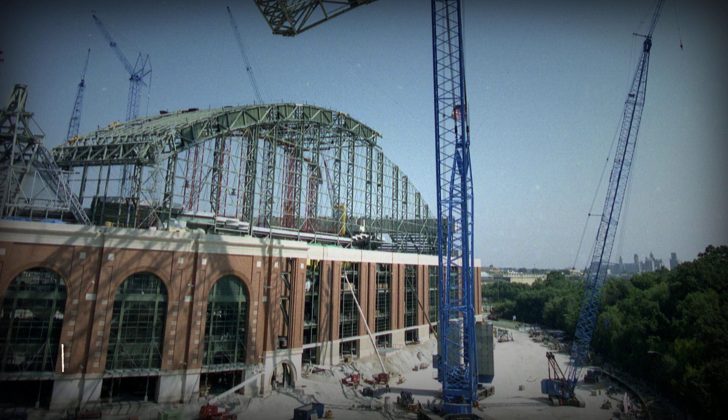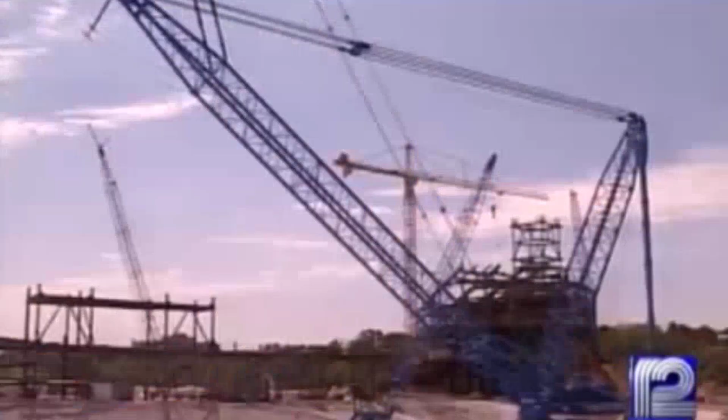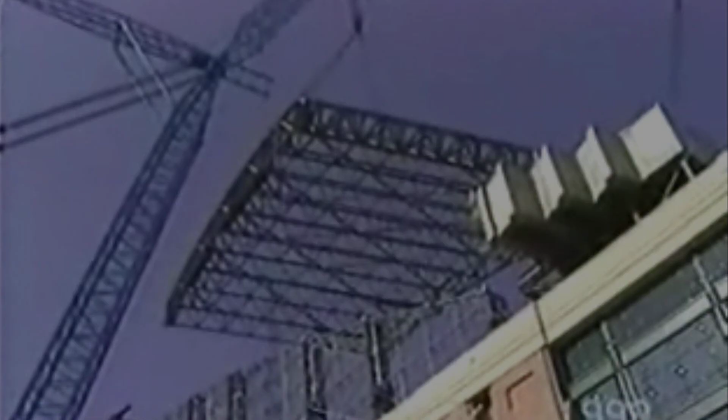July 14, 1999. Milwaukee stands in awe of Big Blue, a 567-foot crane taller than the Washington Monument, a 2,000-ton machine fueled by 11 roaring engines and 6 miles of steel cabling. 9 flawless lifts, each nearly impossible, had already crowned a new stadium roof, but with the 10th lift, management ordered the impossible. A 450-ton section hoisted against urgent warnings as wind speeds soared past safety limits.

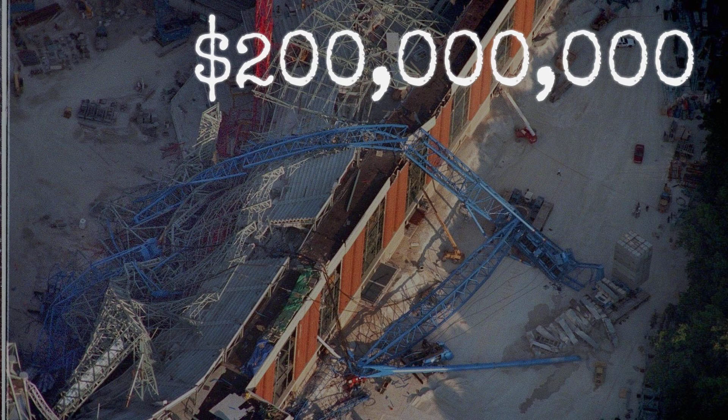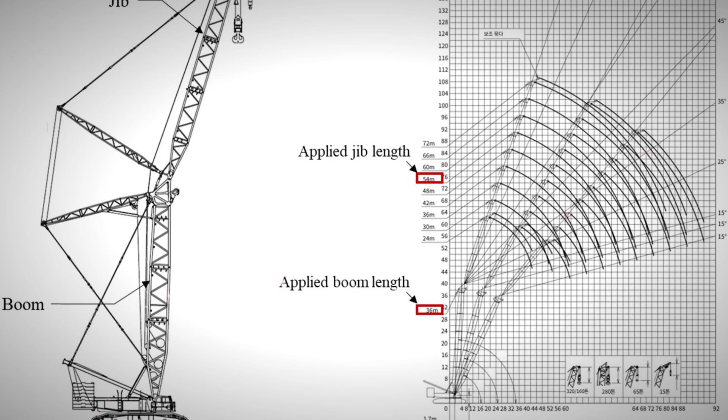Seconds later, disaster. The collapse cost over $200 million and claimed 3 lives, all as inspectors watched, cameras rolling. Why, with all eyes on safety, did the world's most powerful crane fail in plain sight? The answer reveals more than a single flaw. It exposes a lethal chain of decisions no one believed would snap.

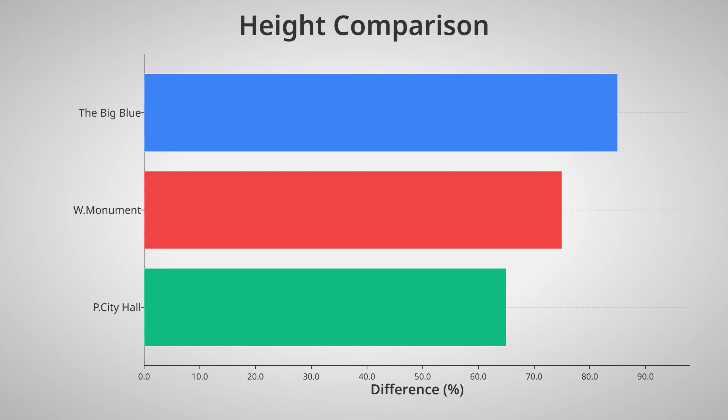The Lampson LTL-1500 Transi-Lift was more than a crane. It was an engineering spectacle. Rising 567 feet above the Milwaukee skyline, Big Blue outstretched even the Washington Monument. At over 2,000 tons, its mass equaled more than 500 pickup trucks.

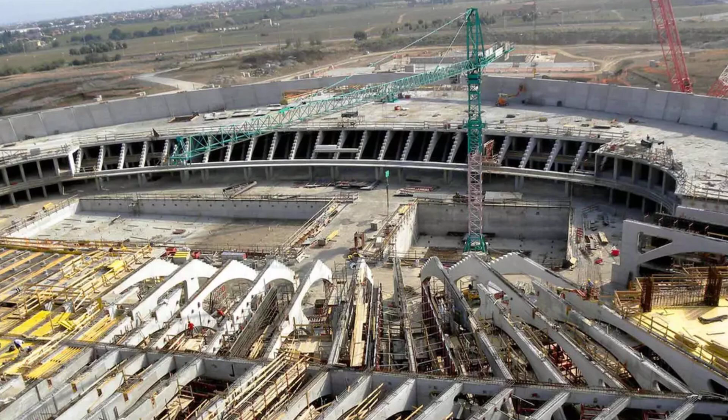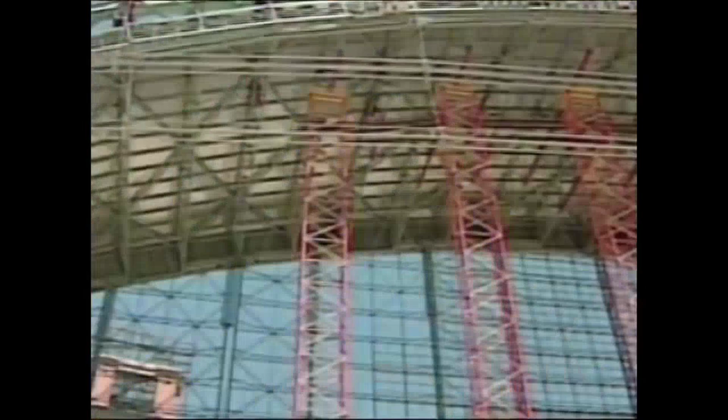Its reach was legendary. A 460-foot main boom, plus a 200-foot jib, allowed it to position massive roof sections with surgical precision. To balance such immense forces, the machine carried 1,150 tons of counterweight. 11 diesel engines powered its every move, a mechanical chorus with the output of a small fleet of city buses. 6 miles of steel wire rope threaded through its structure, enough to stretch from Miller Park to downtown Milwaukee.

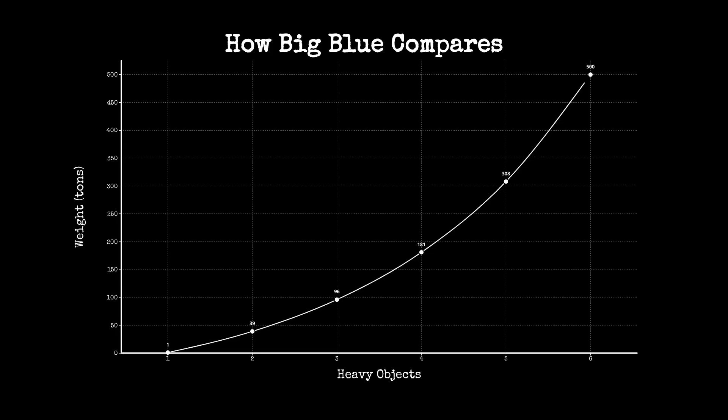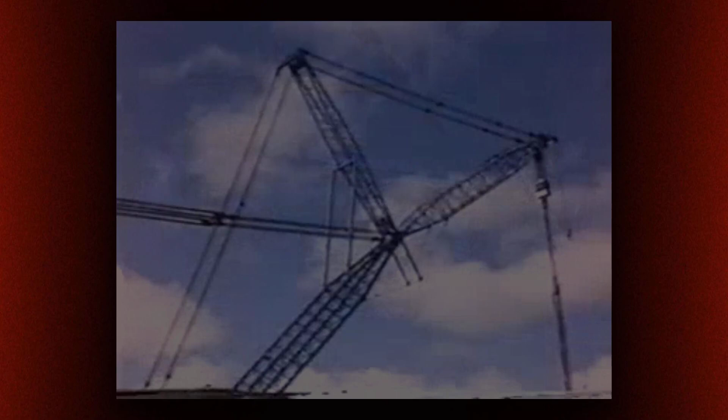Big Blue's lifting power was unrivaled. It could raise 1,500 tons in a single motion, roughly the weight of 10 adult blue whales. Even at a 230-foot radius, the crane could still hoist 500 tons, a feat that would challenge most machines even at half that distance. Its crawler tracks gave it rare mobility, letting it move across the site while carrying a load that would anchor lesser cranes in place.

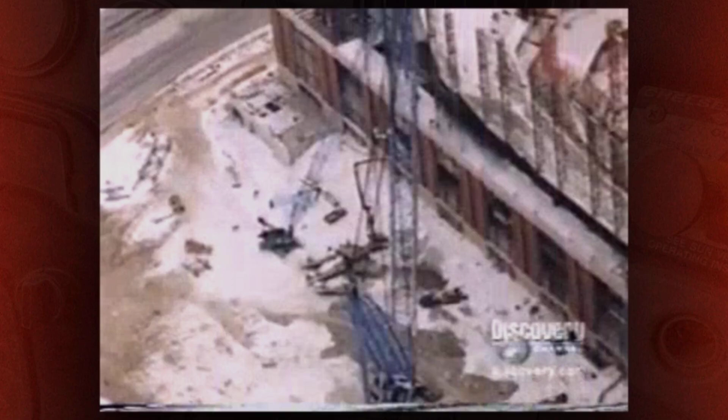Every component was oversized, engineered for the heaviest, most demanding lifts. The operator's cab perched high above the ground, surrounded by a network of controls, sensors, and safety systems. For 9 consecutive lifts, Big Blue had performed flawlessly, delivering 400-ton roof sections onto the stadium's skeletal frame. Each lift pushed the boundaries of what was possible, but always within the machine's design limits.

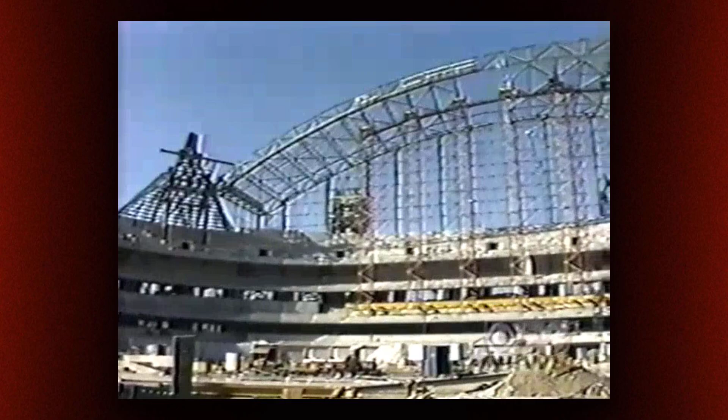The scale was almost unimaginable. Steel, diesel, and wire rope working in perfect harmony, all to crown Milwaukee's new ballpark. Yet, for all its strength, even a giant like Big Blue was bound by the laws of physics. The limits were clear, and any breach would carry consequences on a scale as large as the machine itself.

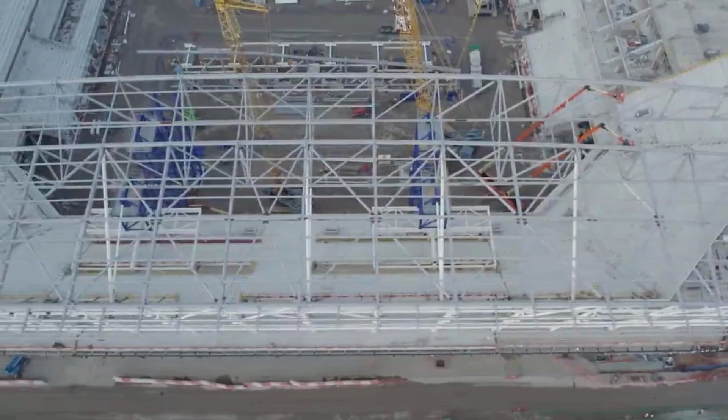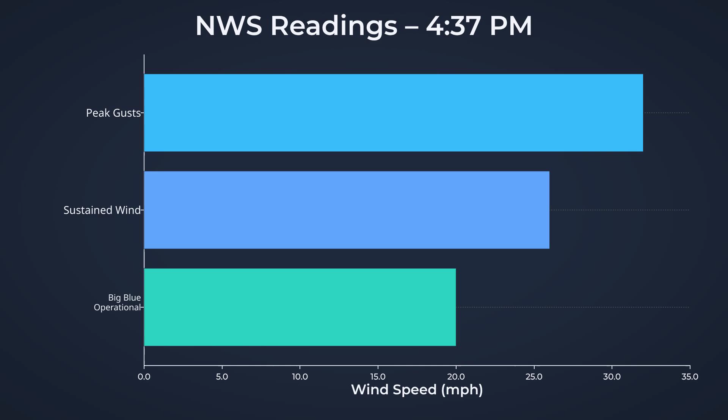Winds swept across the half-built stadium, rattling steel and sending dust swirling around the base of Big Blue. By late afternoon, the National Weather Service recorded sustained winds above 26 miles per hour, with gusts climbing even higher, well past the crane's 20 miles per hour operational limit. In the cab, Terry Young watched the anemometer needle swing, the numbers refusing to drop.

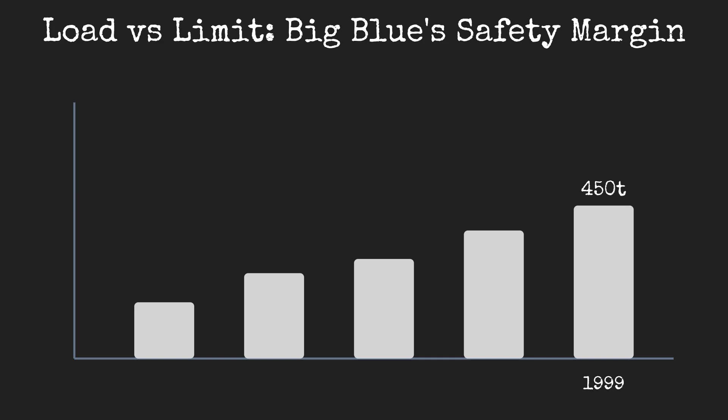The roof section waiting overhead weighed 450 tons, nearly the size of a loaded Boeing 747. Every calculation said this was the edge of what the machine could handle, even in perfect weather. Over the radio, Young's voice cut through the static. He asked for a pause. The wind was too strong, he warned, and the new roof piece would catch the gusts like a sail.

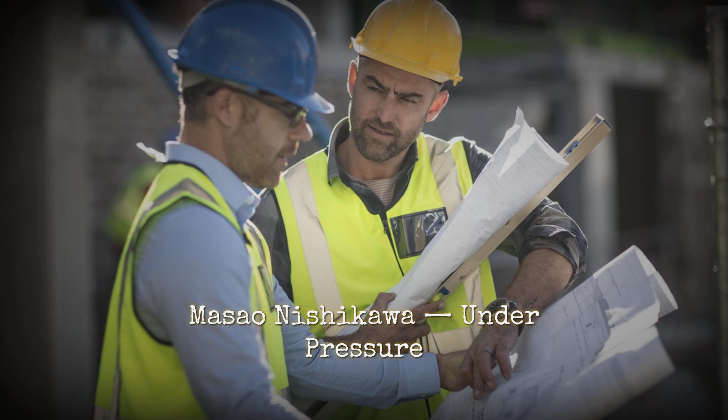But on the ground, Masao Nishikawa, the site manager for Mitsubishi Heavy Industries America, faced a different pressure. The project's penalty clauses meant every hour of delay carried a heavy price. Schedules were slipping, and the stadium's opening day was already at risk. Soil beneath the crane had already sunk by a foot that morning, a silent warning that stability was not guaranteed.

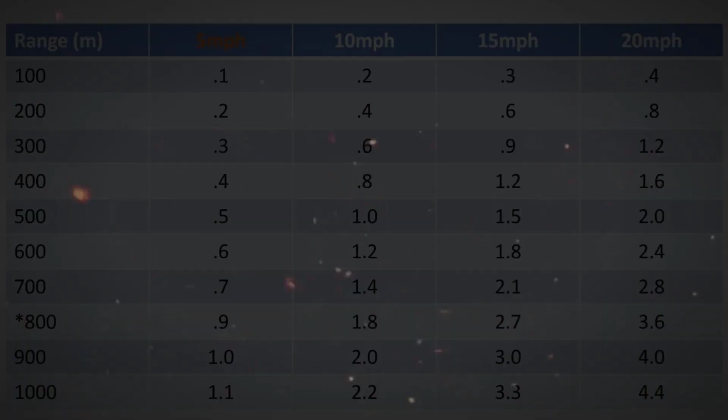Yet, with the afternoon slipping away and the contract clock ticking, Nishikawa ordered the lift to proceed. The decision was final. The operator's hands stayed on the controls, but the authority to stop was gone. Wind readings on paper told one story. The reality, 400 feet above ground, was another. At that height, gusts can surge 40% higher than at the surface, turning a 26 miles per hour reading into a force capable of swinging hundreds of tons.

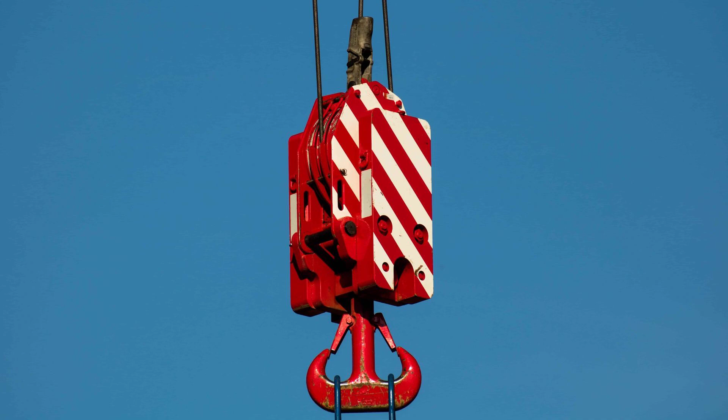As the signal came to start the pick, every hazard, wind, soil, pressure, aligned. The next few moments would test the limits of steel and the limits of human judgment. At 5:12 p.m., the moment the signal was given, a wall of wind swept through the open bowl of the stadium.

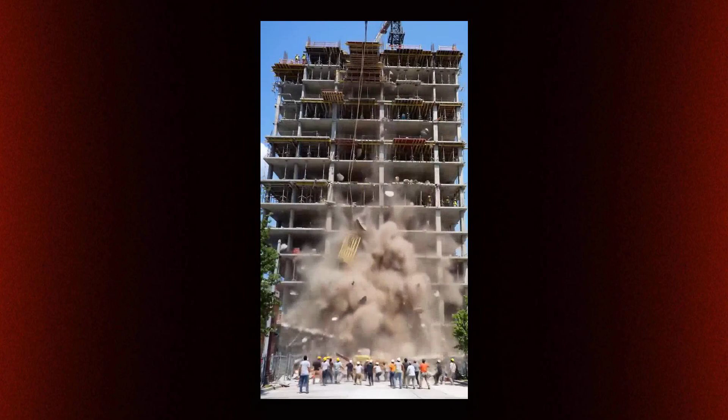The 450-ton roof section, already suspended high above the ground, caught the gusts like a canvas stretched across a frame. Instead of moving smoothly into place, the load began to sway, amplifying every pulse of wind into a force the crane was never meant to resist.

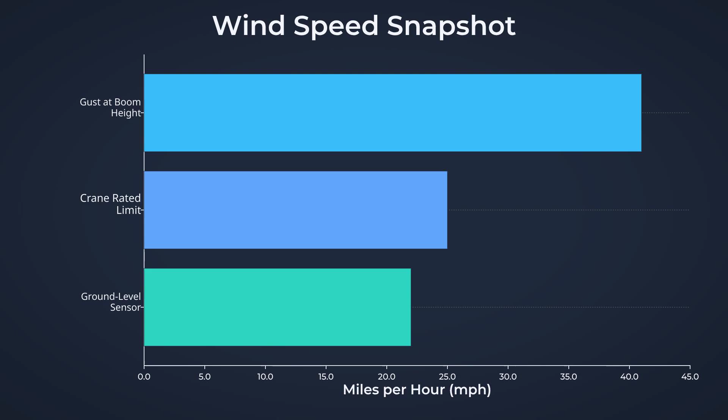At the base, the kingpin, an alloy steel shaft meant to anchor the entire rotating assembly, became the fulcrum for disaster. Wind pressure on the roof panel surged far beyond what ground-level readings suggested. Computational models later showed that gusts at boom height could spike over 40 miles per hour, nearly double the crane's rated limit. The roof section's broad face acted as a sail, multiplying the lateral load and twisting the structure against its own foundation.

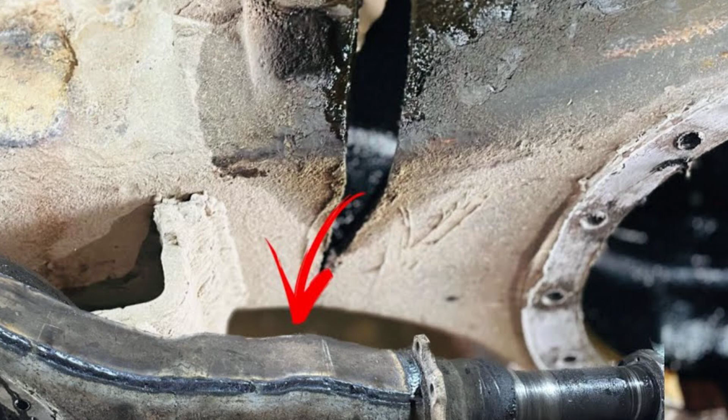Inside the cab, Terry Young would have felt the machine shudder, the controls suddenly sluggish, the world outside tilting out of balance. A sharp metallic crack split the air, a sound captured on OSHA's running video. That was the kingpin, already weakened by an undetected crack and field modifications, giving way under the combined assault of shifting mass and side wind.

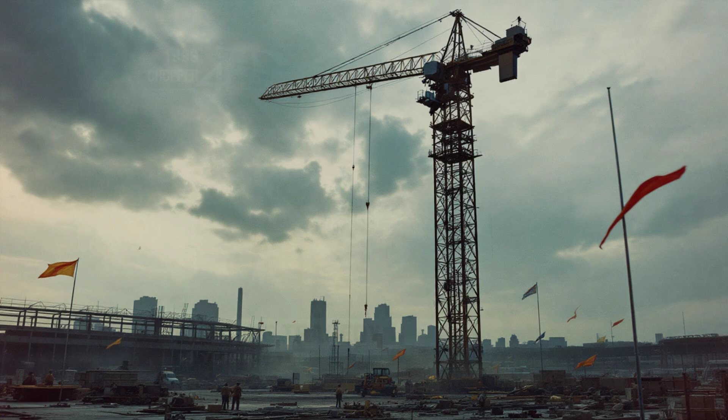In a fraction of a second, the bronze spacer beneath the kingpin shattered, ejecting fragments and shearing the locking ring clear. Freed from its anchor, the entire rotating assembly lurched sideways. The boom and jib, still bearing the full weight of the roof, began a slow, inevitable collapse. Steel cables snapped in sequence, counterweights tore free, and the lattice boom folded as if it were made of wire.

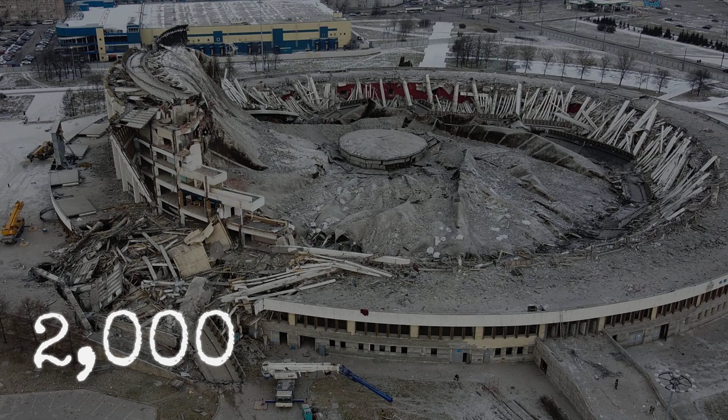The entire superstructure toppled in a chain reaction, the mass of 2,000 tons crashing down onto the site below. The collapse was over in less than 10 seconds, but the mechanical violence unleashed in those moments would echo through every corner of the construction industry.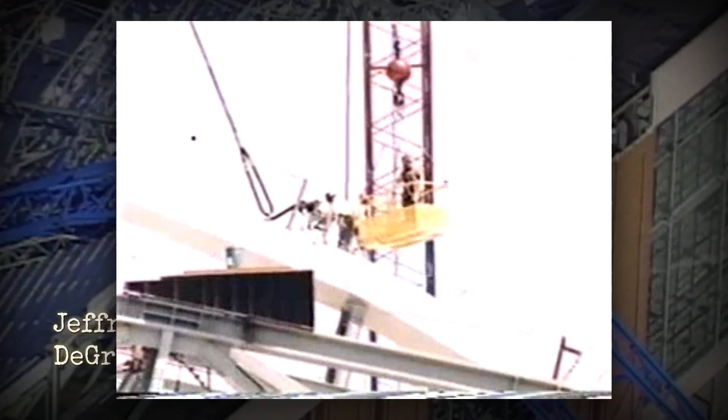3 ironworkers lost their lives beneath the tangled wreckage: Jeffrey Wischer, William DeGrave, and Jerome Starr. Each was working from a personnel platform, suspended high above the ground, when the falling boom struck without warning. Their names are etched into the memory of Milwaukee's labor community, and in 2001, a bronze sculpture by Omri Amrani was installed at Miller Park to honor their sacrifice. For their families, the aftermath was measured not in numbers, but in absence.

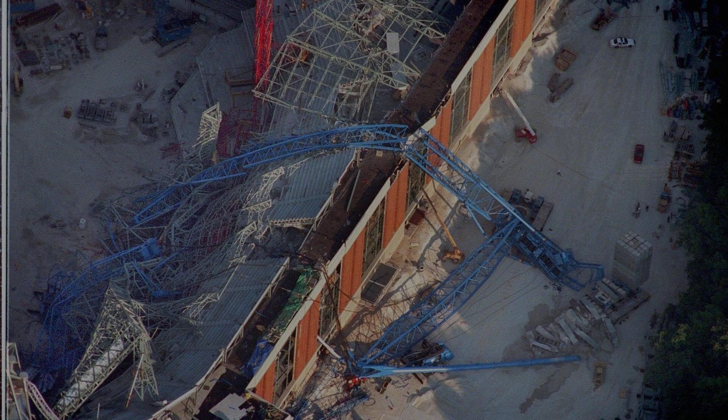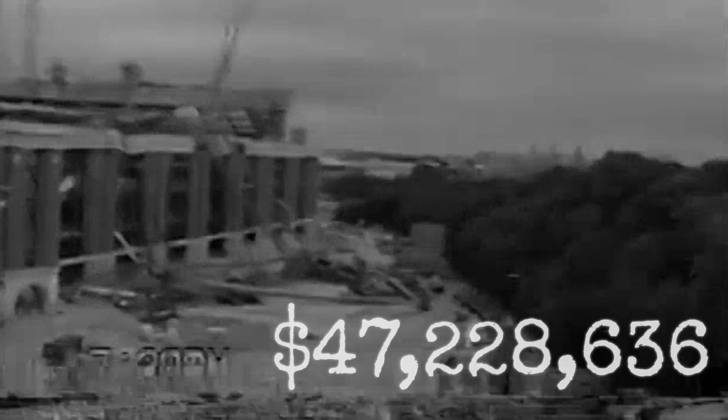The financial toll was staggering. Stadium repairs alone reached $100 million. Legal battles stretched on for years, culminating in a state record jury verdict: $99.25 million, with $94 million assigned as punitive damages. After appeals, the final settlement paid to the victims' families was $30 million. OSHA fines added over $500,000, and the year-long delay in opening the ballpark cost another $50 million.

The project's final budget soared to $413.9 million, nearly $92 million above the original estimate. Tallying fines, lawsuits, and lost time, the total impact exceeded $200 million, making it one of the most expensive construction accidents in American history. Accountability reached beyond the courtroom.

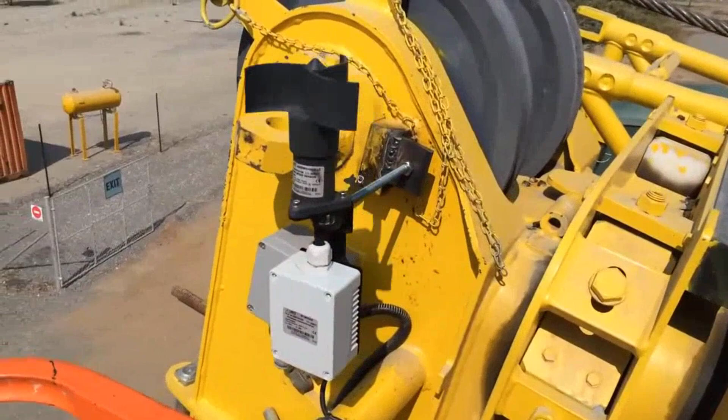OSHA investigators, already present on site, captured the disaster on video and drove sweeping regulatory changes. Today, every major crane lift in the United States requires a boom-mounted anemometer to measure wind speed directly at elevation, not just at ground level. Computerized load monitoring systems became standard, and protective mats now sit beneath cranes on soft soil.

Wind load calculations, once an afterthought, are now mandatory before any critical lift. These protocols are enforced by law, not left to judgment. The lessons written in steel and loss at Miller Park reshaped the rules for an entire industry.

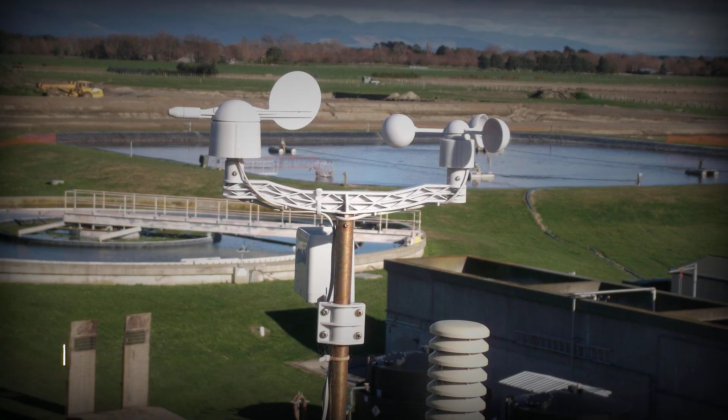On July 14, 1999, winds of 26 miles per hour, well above the crane's 20 miles per hour limit, were officially recorded as Big Blue attempted its 10th roof lift. The operator's warning was overruled by site management, and within seconds the 2,000-ton crane collapsed, killing 3 workers and causing over $200 million in damages.

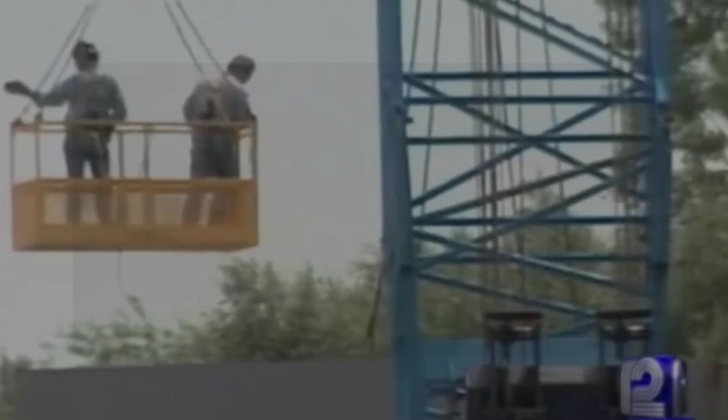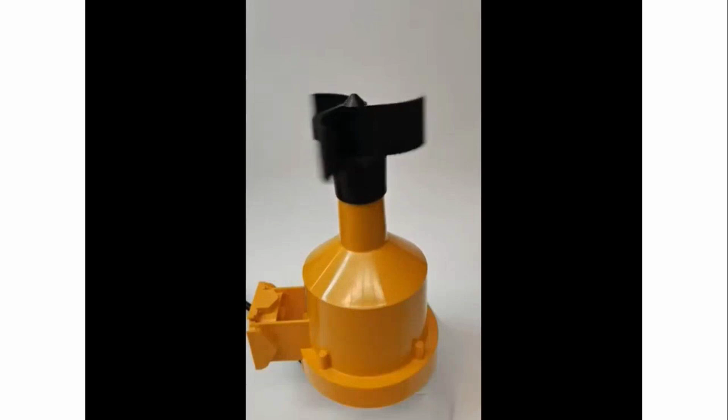Investigators confirmed the wind loads exceeded safe operating parameters, but why management dismissed clear safety concerns remains unanswered in public records. The disaster led to new industry rules: mandatory wind speed monitors, computerized load tracking, and stricter lift protocols. Today, these measures are standard on large construction sites.

Yet, the official OSHA video and court documents still raise the question: could a single pause for safety have changed everything? What is certain is that Big Blue's collapse reshaped crane safety nationwide, leaving a lasting mark on both engineering practice and the families forever affected.